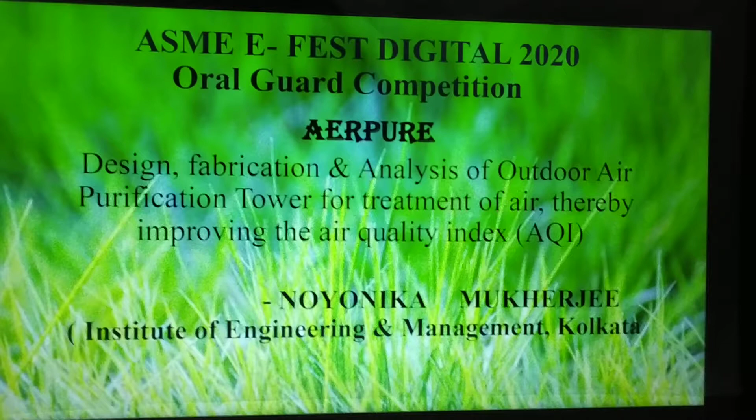Hello everyone, I am Noyonika Mukherjee from Institute of Engineering and Management Kolkata, and I am here to present before you my presentation on AerPure.

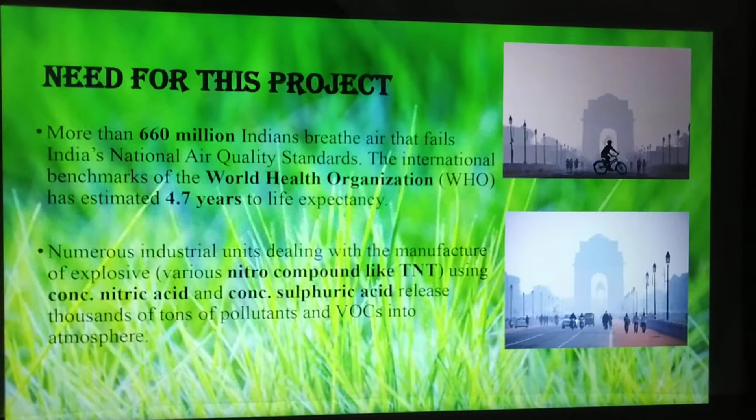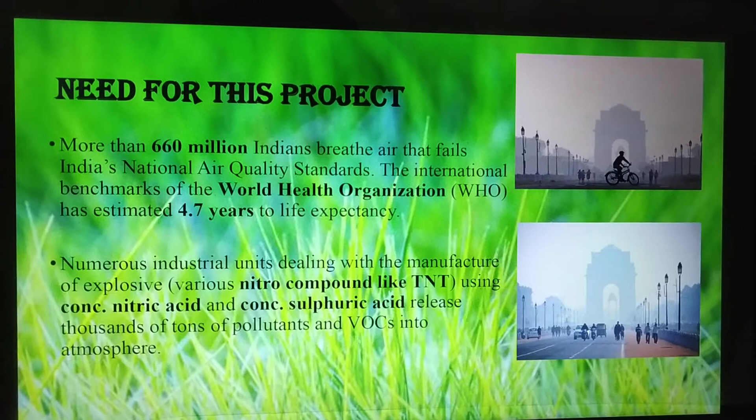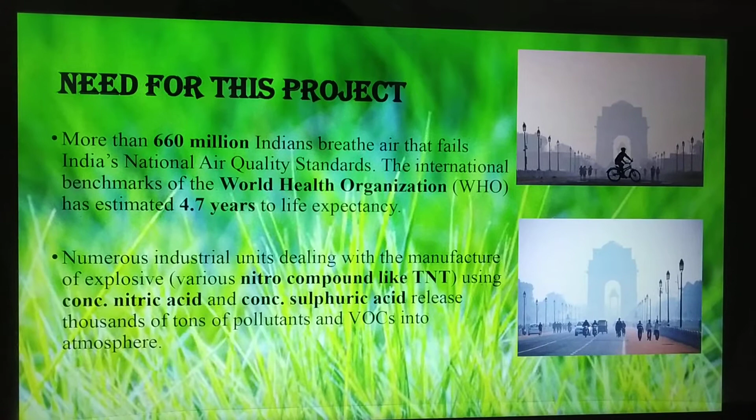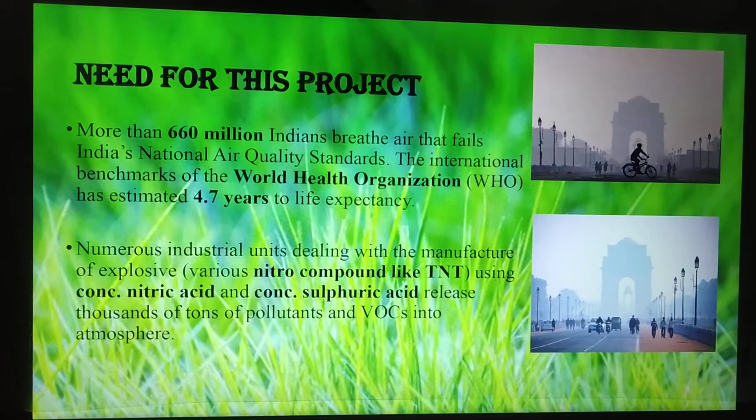We humans have fought in reaching our comfort zone by inventing vehicles and using different industrial things and so on. But now these things are only striking us back. In India, more than 660 million people fail to breathe India's national air quality standard. Compounds like carbon dioxide, concentrated sulfuric acid, and concentrated nitric acid, and so on, which are emitted from industries, vehicles, and so on, if made to reduce, can lead up to 4.7 years of life increment.

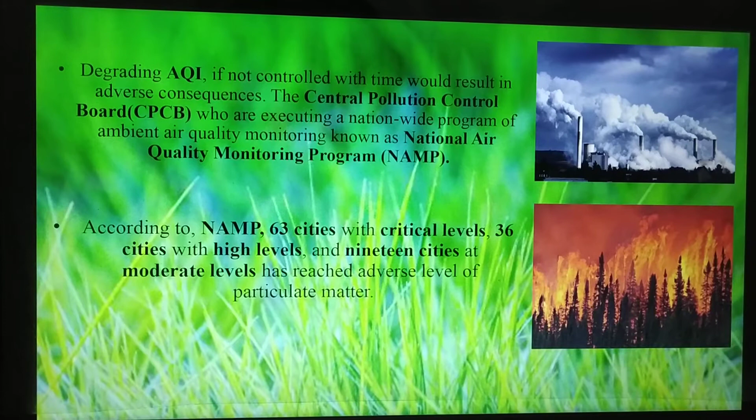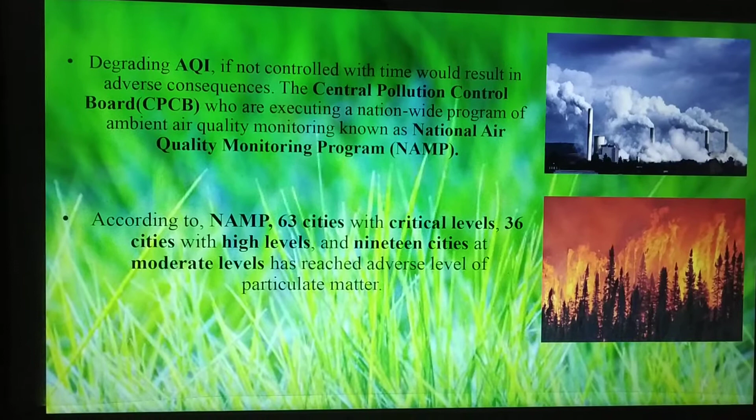Almost more than half of the cities in India are in adverse ramification, having reached critical level of particulate matter, and if not controlled, it would lead to worse consequences. Next, the National Air Quality Monitoring Program also stated that 63 cities with critical level, 36 cities with high level, and 19 cities at moderate level have reached the adverse level of particulate matter.

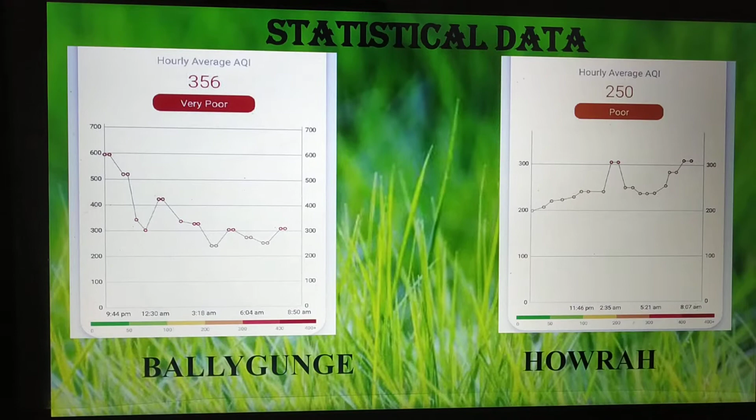Here are shown some of the statistical data taken from West Bengal, some of the places like Ballygunge and Howrah. Here you can see the air quality index has risen to a very high level in very early morning. So let's have a look into the work done abroad.

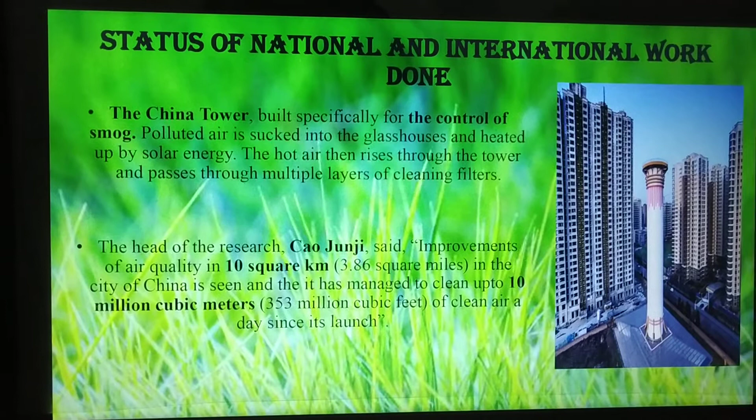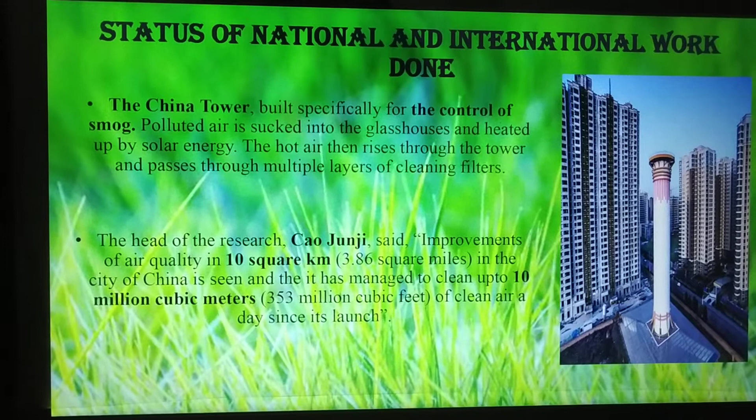The world's largest purification tower, the China Tower, built specifically for control and purification of smog. Here, the polluted air is sucked in and heated up by solar energy, and it has been successful in cleaning up to 10 million cubic meter area up till now.

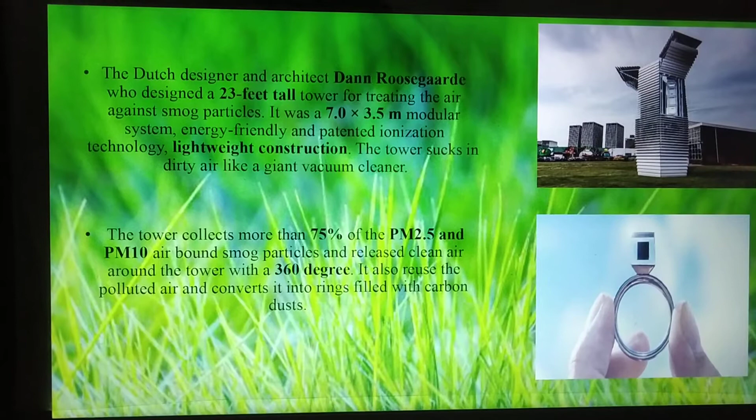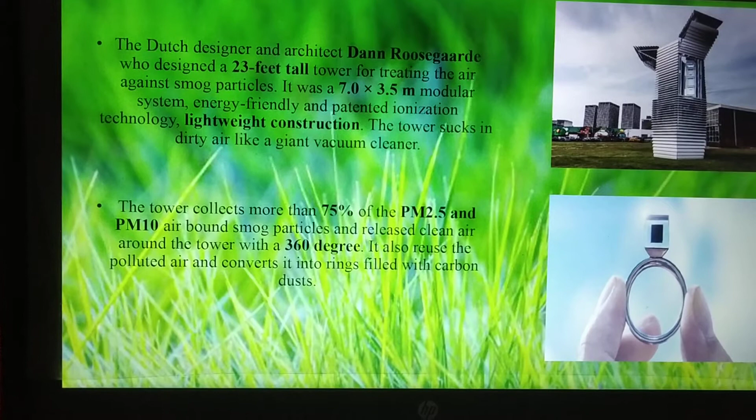And the designer, Daan Roosegaarde, has succeeded in making the same, known as the Roosegaarde Tower, which is 23 feet tall and with a lightweight construction. But the best part in it is that the output pollutant matter is reshaped into a ring formation induced with a high pressure so that it could not further pollute the environment.

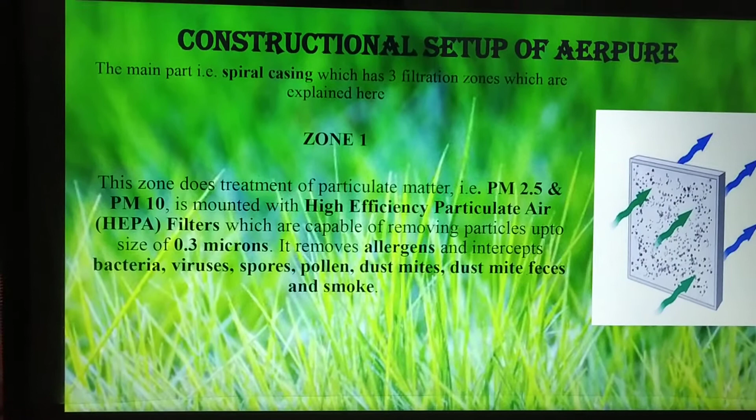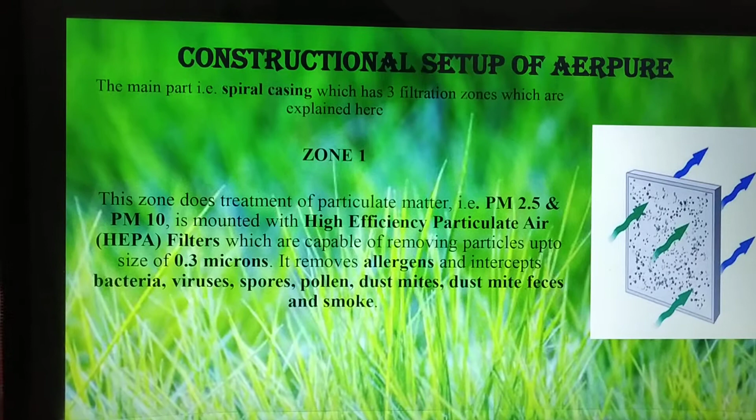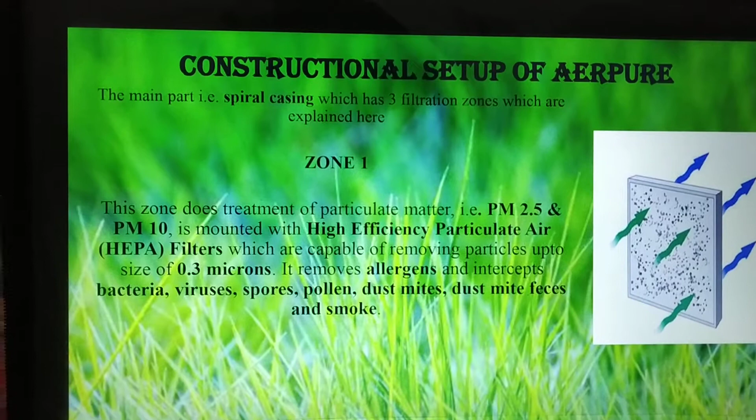The proposed tower Aerpure has three setups. First of all, the cylindrical casing, then the spiral casing, and then the suction fan. Spiral casing consists of three zones. So let's see. Zone 1. This zone deals with the treatment of particulate matter of 2.5 to 10 by using HEPA filter. This filter removes 99.97% of allergens of diameter 0.3 micron and also helps in removal of bacteria, viruses, pollens, dust, and so on.

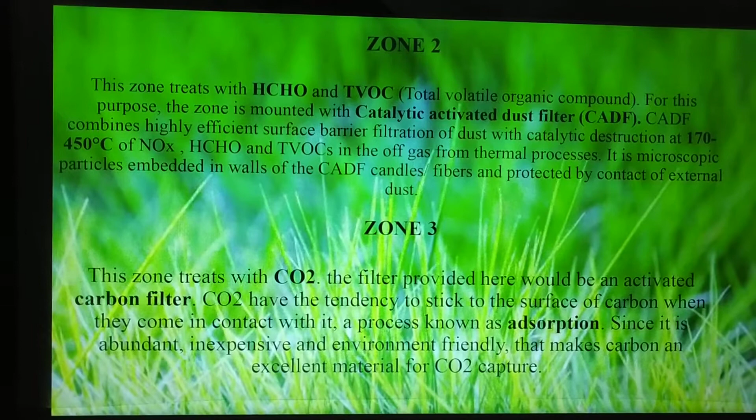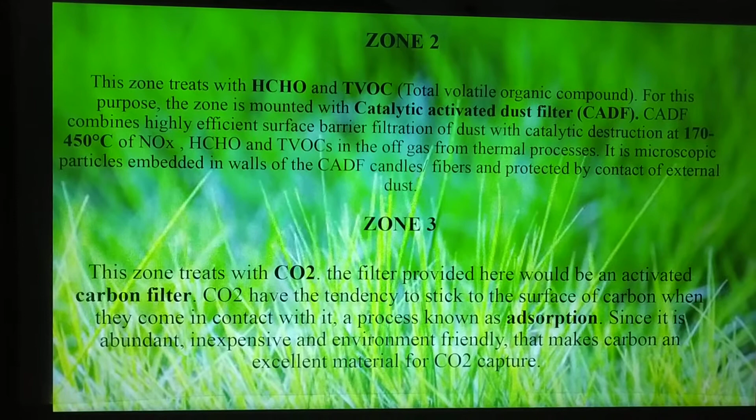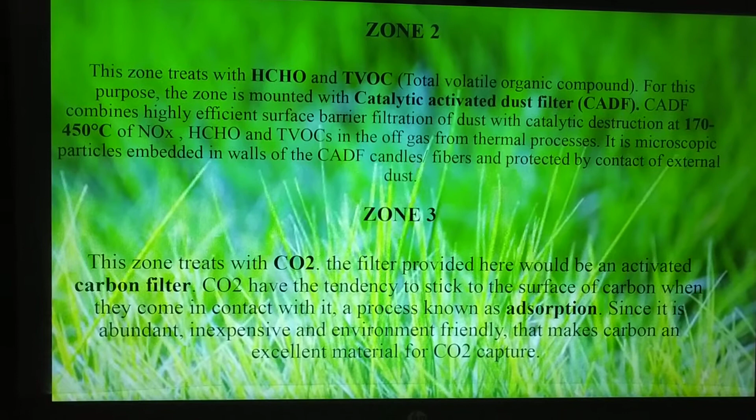Zone 2. This zone deals with the treatment of HCHO and TVOC, and for this it is mounted with catalytic activated dust filters, and so on. It is capable of highly efficient surface barrier filtration along with catalytic destruction at 170 to 450 degrees Celsius of harmful gases by accelerating thermal process.

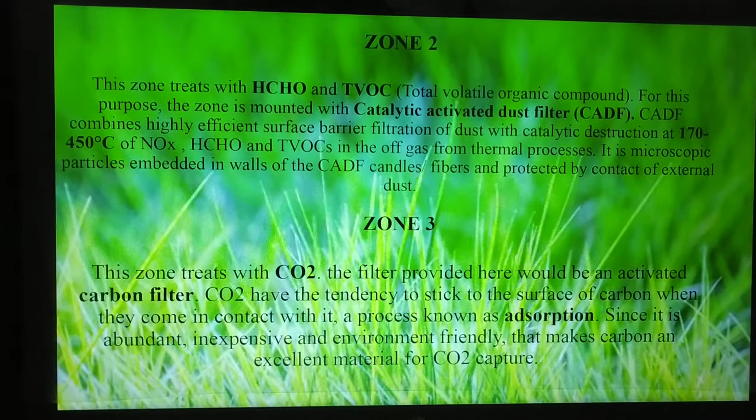Zone 3. Finally, the left out carbon dioxide is further purified by adsorption process by using activated carbon filters. As we all know, carbon dioxide has a specific tendency of sticking on the surface, so this process is best suitable for extraction of carbon dioxide.

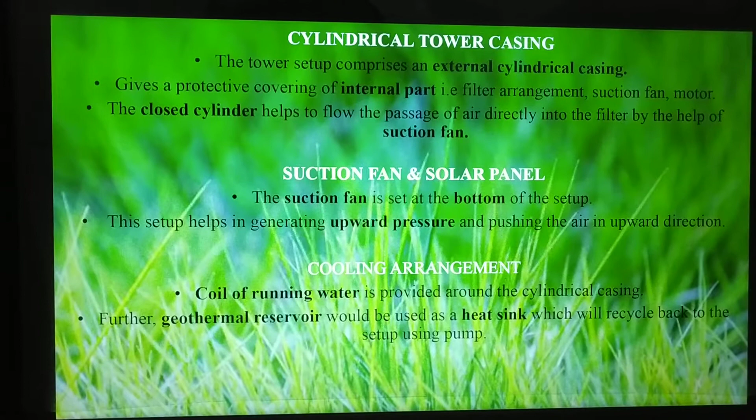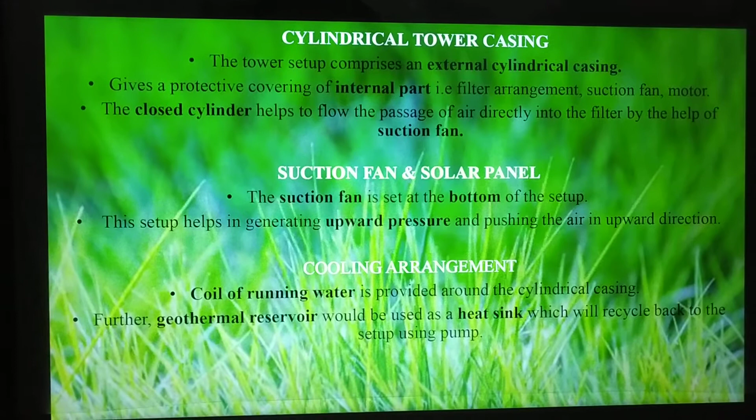Now let's see the external parts of the proposed tower. First of all comes the cylindrical tower casing. It is the external cylindrical casing, and the internal parts it consists of are the filter arrangement, suction fan, and motor. The closed cylindrical system helps to allow the passage of air directly into the filter with help of the suction fan.

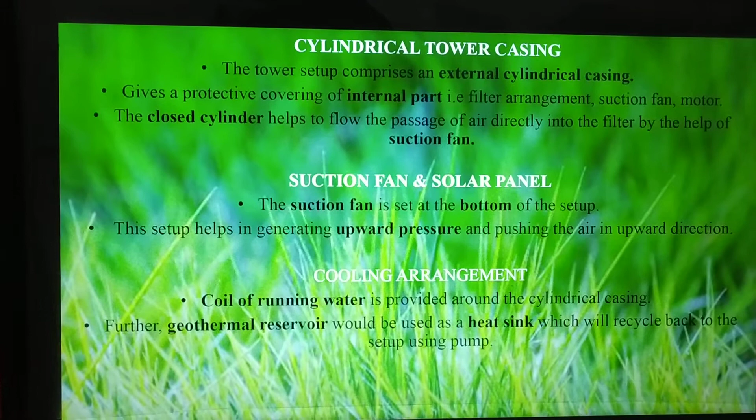The next is the suction fan and the solar panel. The suction fan is set at the bottom of the setup. This setup helps in generation of upward pressure and helps in pushing the air in upward direction. The solar panel here helps to take the natural resources and to run the process.

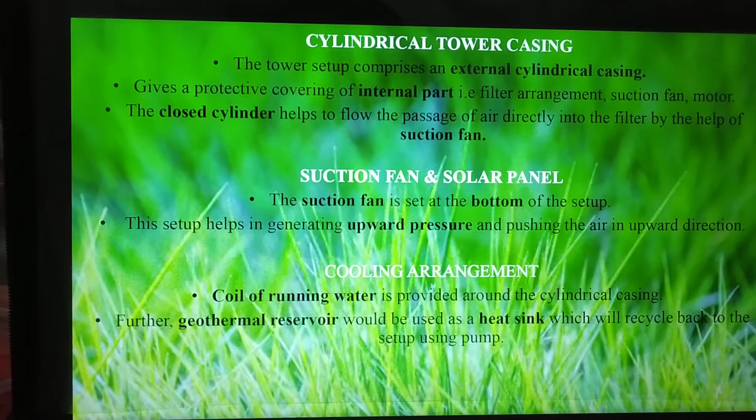Next, the cooling arrangement. Channelization of air is important as the second zone of the spiral casing generates too much heat, so a coil of running water is provided around the cylindrical casing. Further, geothermal reservoirs would be used as a heat sink which will recycle back to the setup using a pump.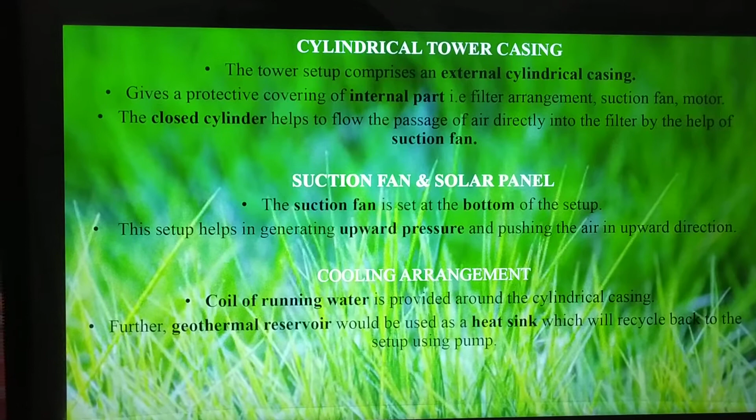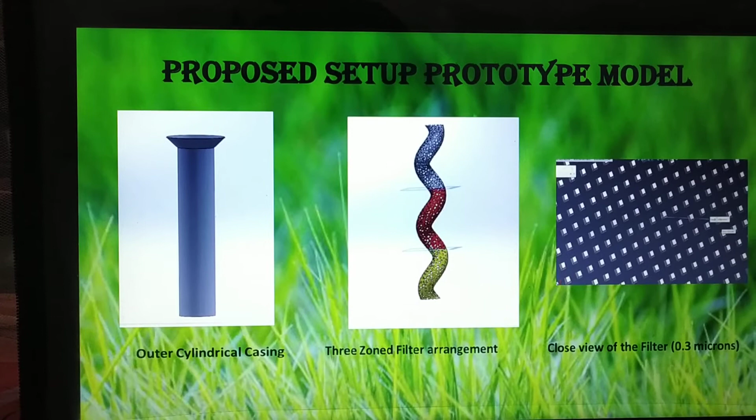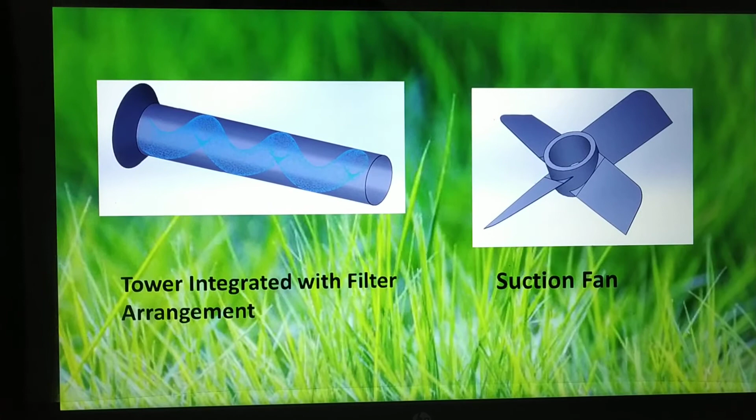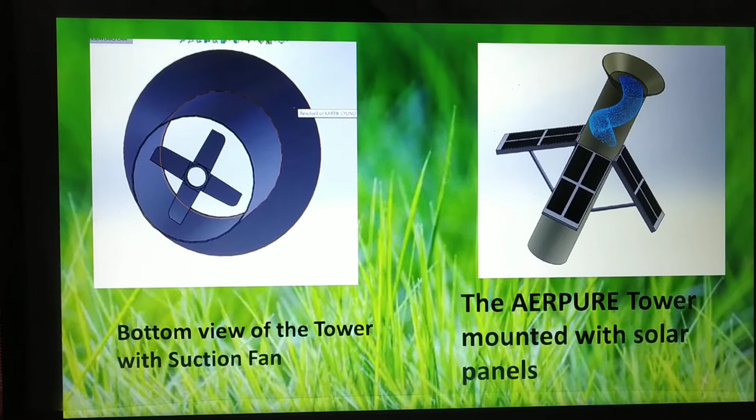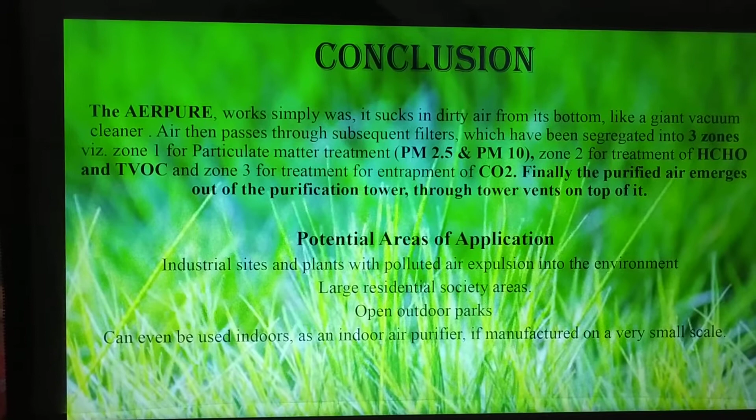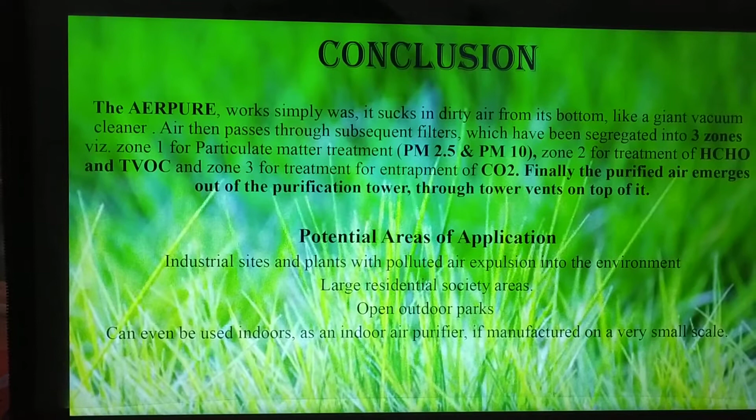The proposed tower, AERPURE, is different in comparison with the China Tower and Roosegaarde Tower, as they only purify the smog, but this tower helps in purification of particulate matter, HCHO, smog, carbon dioxide, TVOC, and so on. Even bacteria, viruses, pollens also. Some research is still going on in this process, so it will continue as stated.

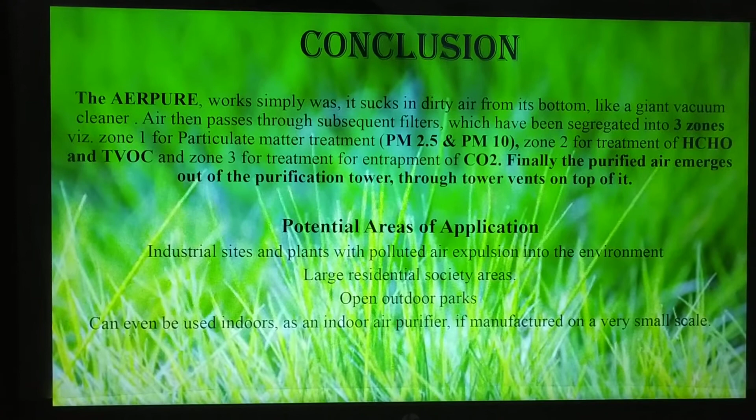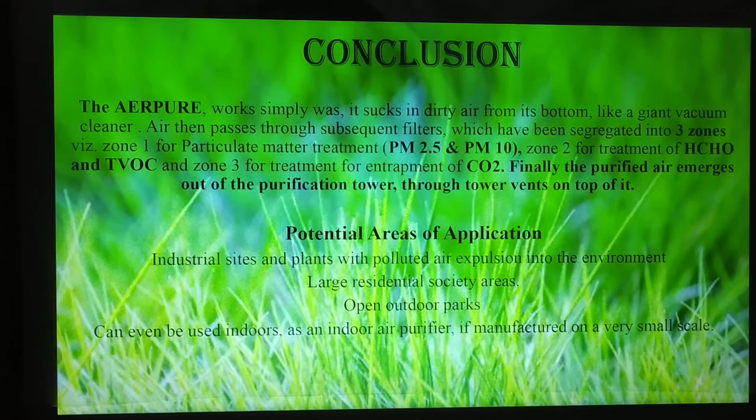Potential areas of application where we can use the proposed tower AERPURE are industrial sites, plants with polluted air expulsion into the environment, open outdoor parks, large residential society areas, and it can even be used indoors if manufactured on a very small scale.